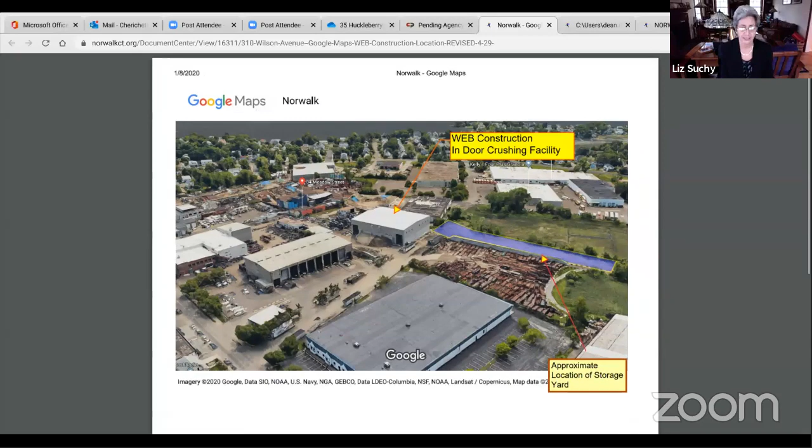I'm sure Kate will go through the functions of the wetlands that exist on the property, so I don't want to steal her thunder. And certainly I won't be able to explain them with any degree of experience. And then Dean will walk you through very briefly the proposed drainage patterns and the like.

As you can see from what's, I think, up on the screen right now, the Google map of the blue area, which is the approximate location of the storage yard. And to the left of that blue area, there's a structure that says Web Construction Indoor Crushing Facility. That's an existing facility owned by my client. The concept would be for materials that are processed within that structure to then be brought across a 50-foot wide path right of way over to this proposed area.

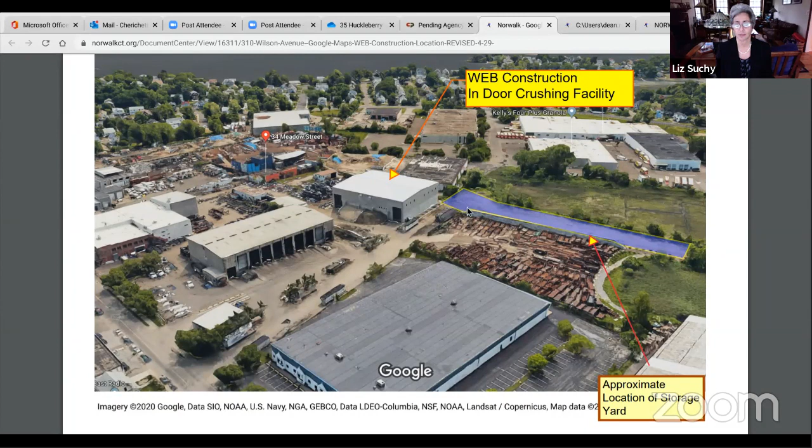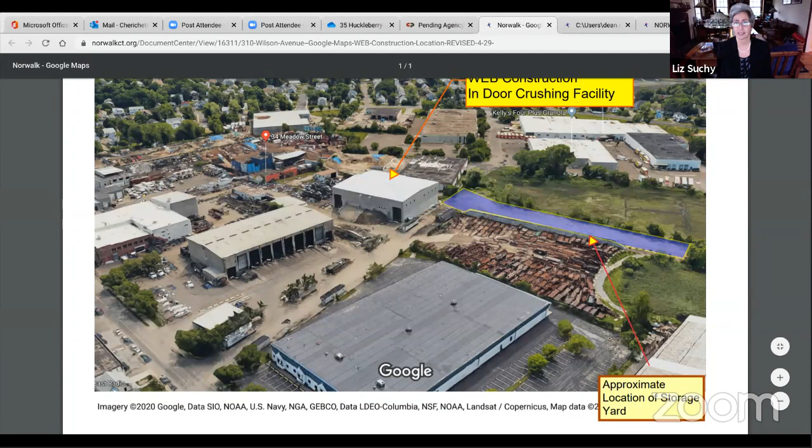Materials would be stored in piles segregated by the type. They would meet the requirements for height of piles, be covered, and have some dust suppression system to keep dust and other particulate matter at a low level. So with that, if you wouldn't mind, I'd like Kate to walk you through very briefly the existing on-site wetlands, their functions and values, and what's being done to mitigate any impacts. So Kate?

Sure. Is it possible to get the other aerial on the screen? It kind of gives a good overview of the neighborhood. The one that we were using just before? No, the other one. Which one? The aerial? Yes. Hold on. The same aerial that was up before. No, there was another one that shows a little bit of a broader view. Okay. There's this one.

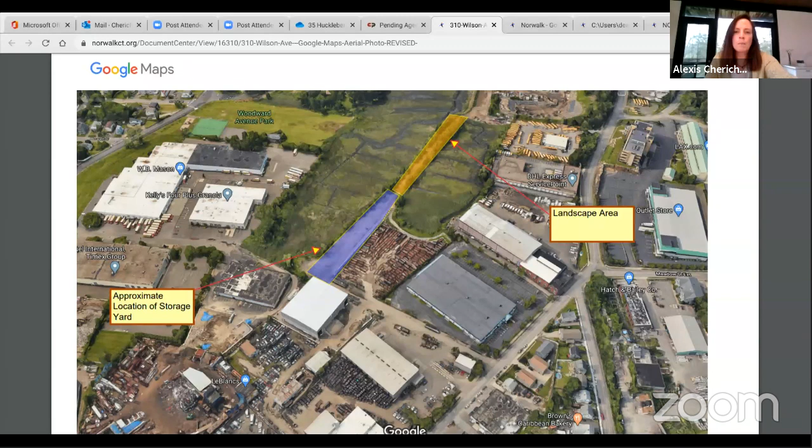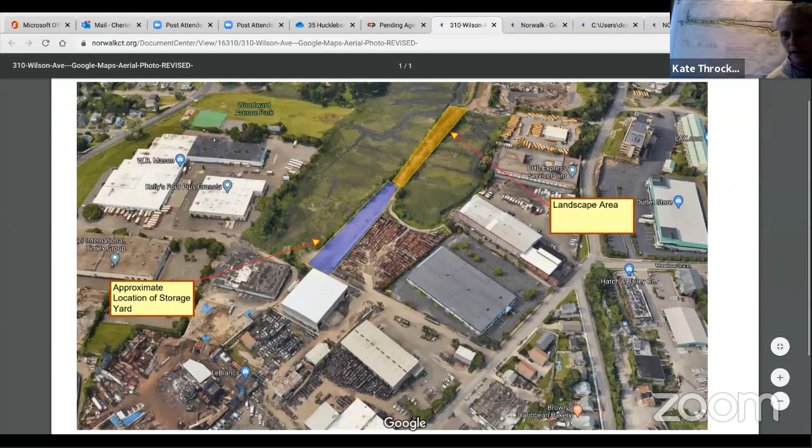Yes. So this one just shows you a much broader view of the neighborhood with Wilson and Meadow Street to the right side of your screen. The industrial uses along that road there, the access road coming off of Meadow, coming to the current Crushing Indoor Facility, and the area that's highlighted in blue and yellow is really the only area that's shown on the survey.

So seeing the survey itself is to me kind of disorienting because it just shows one long strip. And so once you get onto this strip, which appears to be a connection to the other construction yard on Wilson Avenue, it certainly historically is cut through a tidal marsh that is associated with the Village Creek on both sides of it, essentially where the yellow portion of the highlighted area is. And that area is targeted to be replanted and mitigated and to revert back to a natural area, where the blue area, and Dean will go into a little more detail, will be used for storage.

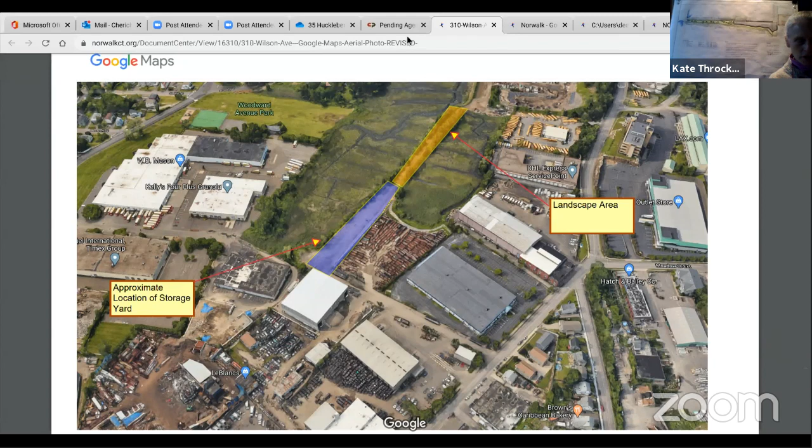So just briefly, the mitigation plan, when it's implemented, will add over 100 trees to the area. It will certainly provide a little more of a buffer. Maybe we should go to my rendered plan.

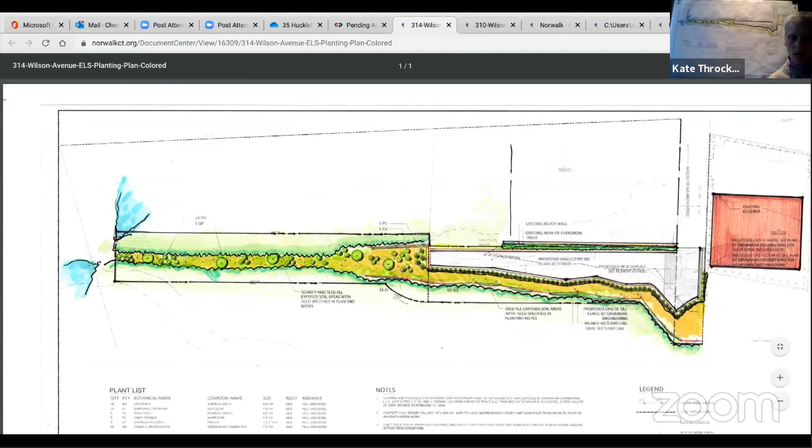Great. Okay, so as I mentioned before, this plan really just shows the very narrow strip of that long access road in between the two industrial sites. To the right side of the screen is the area that's proposed for the construction area, and the left side is proposed to be replanted with mitigation.

Below the construction area, you will notice there's also an area that's going to be naturalized as well, and that strip runs anywhere from 21 to 72 feet in width, and that will be planted back into a meadow and allowed to naturalize. And the area to the left side of the screen is over 8,500 square feet of new mitigation area. And that gives you a brief overview of what I'm planning. I think maybe Dean can go into the details on how the construction site will be created and contained.

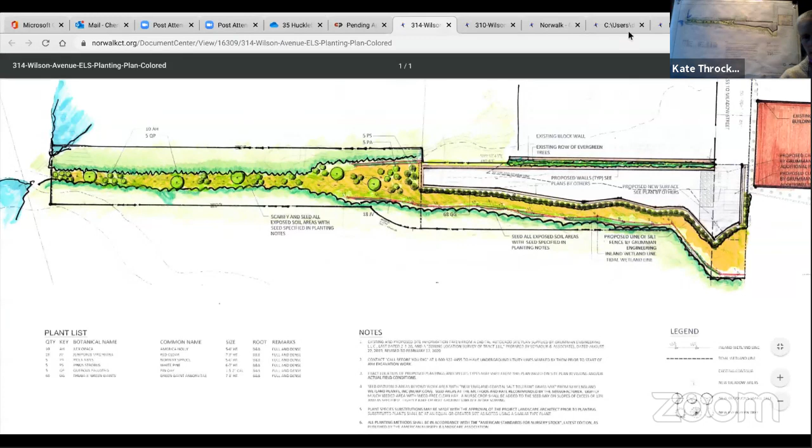Hello, everyone. Dean Martin with Grumman Engineering. As stated, this tract, which is known as tract 1, is approximately 2.3 acres. It's a long, narrow strip. It runs north and south. The proposed contractor's yard is going to be located in the northern and western portions of the property, and that's going to comprise about 0.5 acres.

The contractor's yard will be surrounded by a concrete block wall ranging in height up to 20 feet. That'll be totally surrounding the material storage area. And additionally, on the outside of the concrete block wall will be planted 7 to 8 foot tall arborvitaes. They'll be spaced at approximately 6 feet on center, with a siltation fence placed on the outside of the arborvitaes.

The area, as mentioned, is currently just dirt. So what the contractor is proposing is to place some crushed asphalt, or millings, along the surface of the material storage area. This will keep dust down, and it'll also help with erosion control. The area at the entrance, which is coming off the 50-foot wide access strip, will have a gate there, and then there'll be a paved entry area.

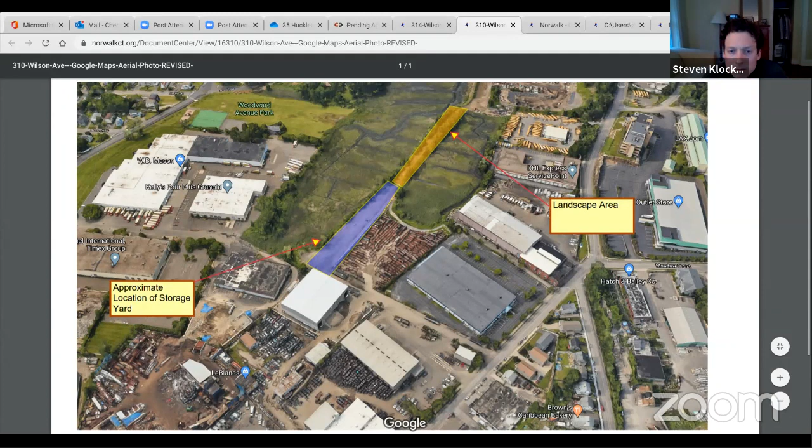Well, I have to say, I don't see how the two parcels of salt marsh are connected. It seems to me that you've got one piece of salt marsh that's no longer connected to the ocean. So there may be culverts, or some other way that these two pieces communicate with each other. That's something we don't know. I think you're absolutely right, because you see the channels kind of line up on either side of the orange section, so I would assume that is how it functions right now.

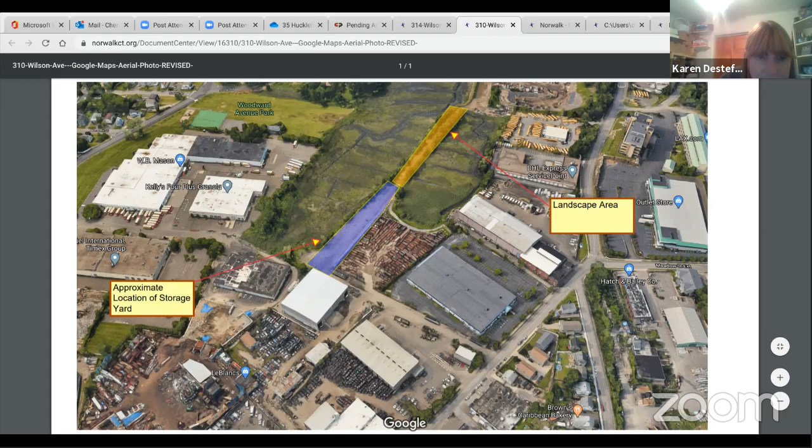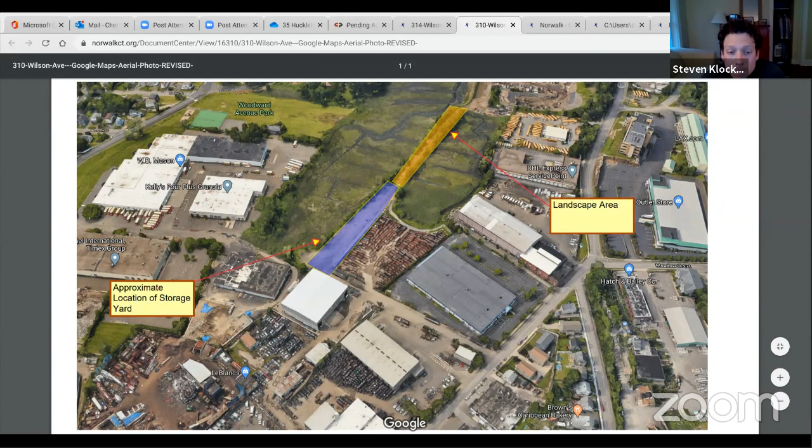I don't even know if it's an improvement if you were to get rid of the raised elevation in the orange section and drop it all down to its natural height. I assume that's a better thing, but I don't know that for sure. I'm just throwing it out there. I'm just telling you where my brain is at right now. That's all. All right.

We are a conservation commission, so, Liz, did you have a comment? There you go, Liz. The proposal is to take that southern portion and reestablish it as a vegetated area. But it wasn't raised up originally. Naturally, it would be down low, and we wouldn't even see anything there, right? Well, I can't say what it used to be. I can only deal with what it is today and what we intend to do to improve it.

Right. So the area that we need or we'd like to use does not encompass the entirety of the site. So the southern end would have all of the plantings as Kate described and all the protections, and make it more, I guess, wooded, vegetated, or natural, trying to return it to something similar to what it was years before the development of this area as an industrial area of town. That's about all we can do.

And I think it's probably better to leave the elevations as they are, plant the vegetation, install the drainage systems on the portion of the property that we plan to use, rather than start to change elevations and who knows what other issues may be created by that. Yeah, if it's functioning already, then by digging up a bunch of stuff and stirring it up, are we actually improving it? I don't know. I'm just curious what other people think. I hear what you're saying. Cheryl had a comment.

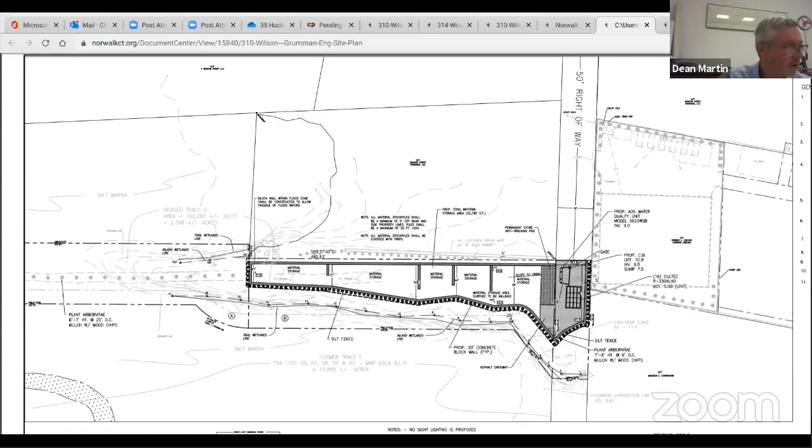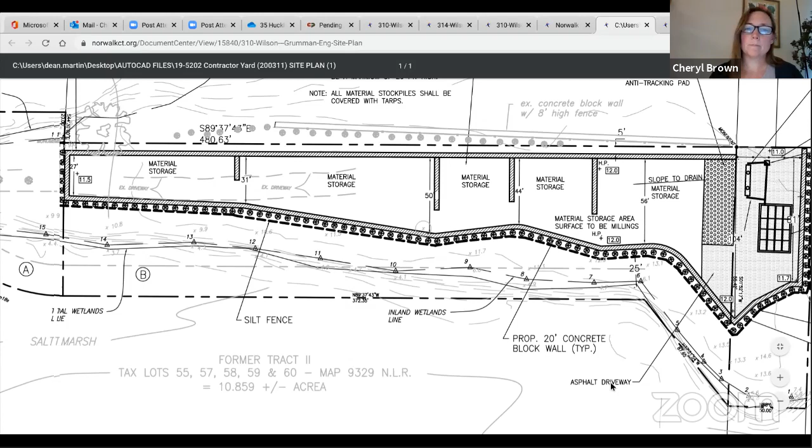And what is the distance of the walls to the wetland line? Because I don't have it on paper, so I can't measure. I guess the closest that it's running, I think the closest is this 25-foot here. Okay. Yes. At wetland flag number 6. Thank you. Okay, any other questions?

And just to clarify, the applicant is not the property owner, correct? That's correct. And you had mentioned that the property is within the flood zone. It's within the coastal area management zone. But also in a flood zone? Dean, does the flood line go directly through the entirety? Well, it does through the property, yes. It runs along the eastern portion of the property and then cuts through our storage yard at the western end. Okay. So part of the contractor's yard storage area would be within the 100-year flood zone.

Yes. And so when that's inundated, I want to make sure I understand. So you have your block wall, and on the bottom of the block wall, you said that the two bottom layers would be wrapped in some kind of geotextile? Yes. A fabric would be around that, a kind of strong industrial strength. Okay. And that fabric would be exposed on the inside of the yard, or? It'd be essentially on both sides. It would wrap around, go down underneath and back up on the outside of the wall. Okay.

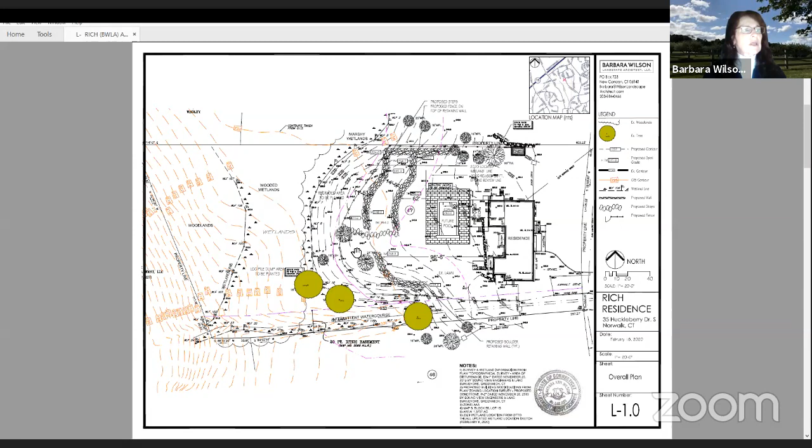So this is the site plan of where the retaining walls are going to go. There's going to be a retaining wall on the north property line, then 2 sloping retaining walls going down the slope, and then another one here. There's going to be some stairs fit into the slope to provide the owner access to maintain the property and get into their backyard in the wetlands. This plan has images of what the walls are going to look like. They're going to be big boulders set by machines. The steps are going to be irregular stones set into the slope.

And then at the top of the wall where the pink line is, with fences. Sorry, where did I put the fence? It's hard to see. So the fence line will go on the north property line, down below the lowest walls, curve around back, and then connect to an existing fence here. This will be wood boards with wire, so that it will double as the pool enclosure fence, keep the dogs in, and also keep the kids safe in the backyard.

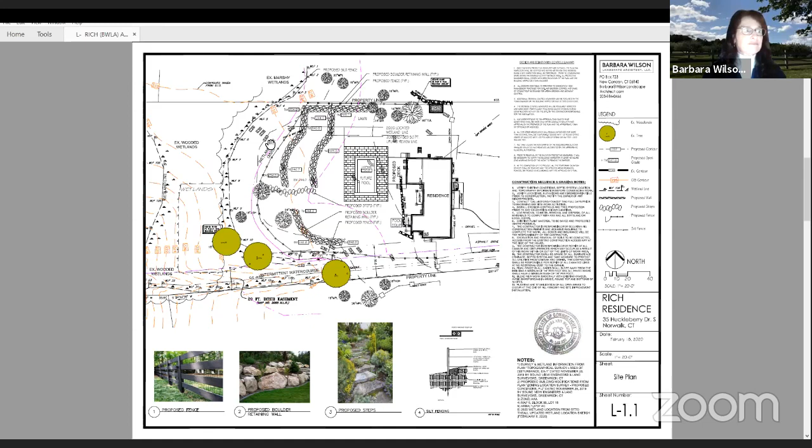So this area we are proposing to remove all the logs, and then we will replant. This area from this line to this pink magenta line is the areas of the filled wetlands that were determined by Otto's latest report. So this area is going to basically be, all of the dirt is going to be removed and reestablish the existing slopes basically to the wetlands when they determine it by the soil type. And we will be replanting that area and stabilizing it.

There's going to be 2 varieties of ferns and some American hornbeams, which are sort of native in this area in the woodlands. And it's going to be planted directly into the existing wetland soils that are under the stacked trees. There's no grading there, no filling.

There are several grassy mixes like carex and juncus. And then there's some flowering wetland plants like verbena and asclepias and irises. And that way, with the seed mix, what wants to be there and can be established there will grow well. And then anything that's in that mix that doesn't like it will not survive, but hopefully there's enough species that will take quickly and fill in this area.

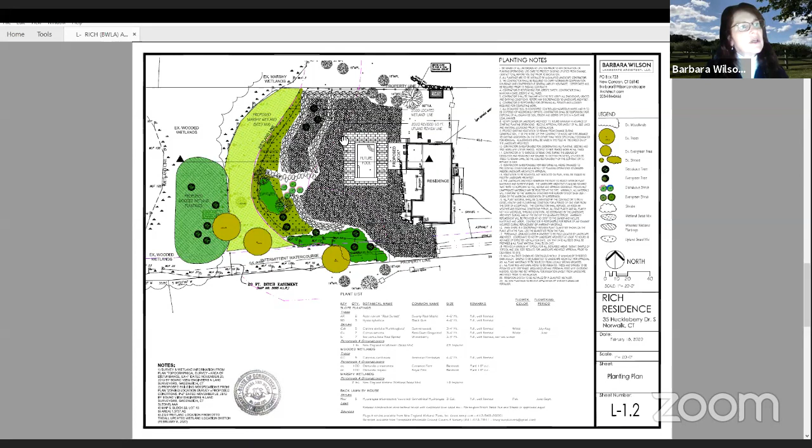So then the rest of the area is going to be planted to lawn up at the top most level surrounding the house and the pool. So that's it for me.